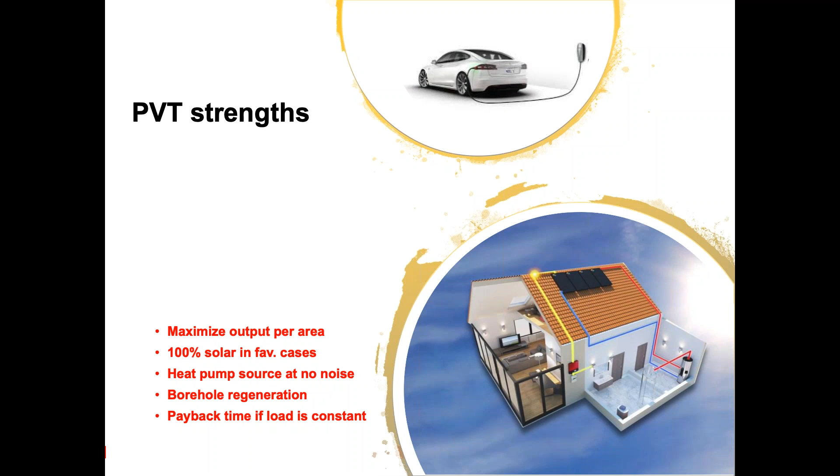The first thing I'd like to tell you is the strength of PVT. With PVT, we can do electricity for sure. We can also do heating, direct or indirect with a heat pump, or cooling, also direct during nighttime or indirect with a heat pump or compressor. What we think is our strength is that you maximize the output per area of your roof or collector area. In some cases, you get 100% solar because you can also run the pump with the PV part of the solar collectors. If you use a heat pump together with PVT, it's a nice source because you have no noise and no borehole - and if you do have a borehole, you can regenerate it during summertime. And of course, if the load is favorable, as I'll show you in some cases, the payback time is really impressive.

Now I'll explain a little what PVT is. I guess most of you know it's a hybrid technology - we have an absorber at the bottom of the collector, and on top of it we have PV modules linked to the absorber by some gluing system. You can have glass on top, or you can have no glass, which is called uncovered in common language, but for scientists it's called a WISC collector.

You'll hear the WISC label more than once - it stands for Wind and Infrared Sensitive Collector. If it's not glazed, you get some extra action during nighttime from the ambient air on top, or the ambient air at the bottom of the collector if it's freestanding.

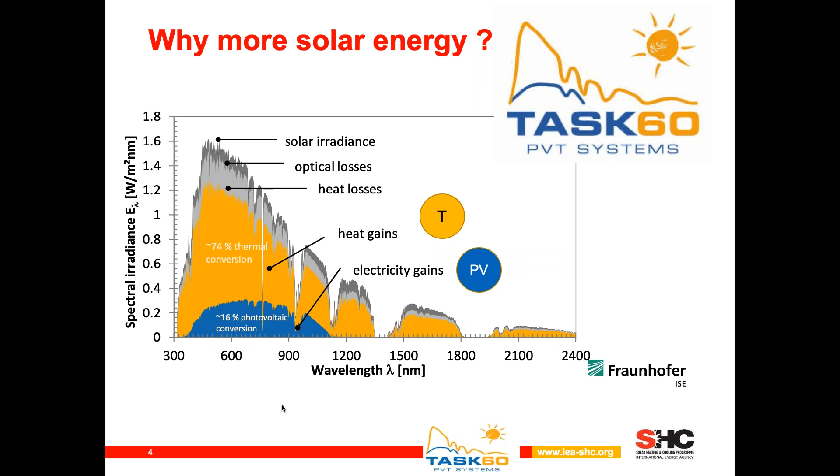This is why the Task 60 logo was designed like this. The yellow part is what the thermal collector, the absorber, is going to convert from the sunlight, and the blue part is what the PV cells are going to convert. So if you add the yellow and blue spectrum together, it's a larger spectrum than if you only used the yellow or the blue separately - that's why you get more solar energy out of a PVT module than out of each module on its own.

We have factors affecting the performance of both the PV and the thermal part. Let me simplify this. First, there's tau alpha, the transmittance and absorbance of the collector, which reduces thermal efficiency a little. Second, there's the heat removal factor, the way heat moves from the PV cell, which acts as the absorber, down to the metal sheet and then to the fluid. It's a little less efficient than a normal thermal collector, so there's a negative effect there too.

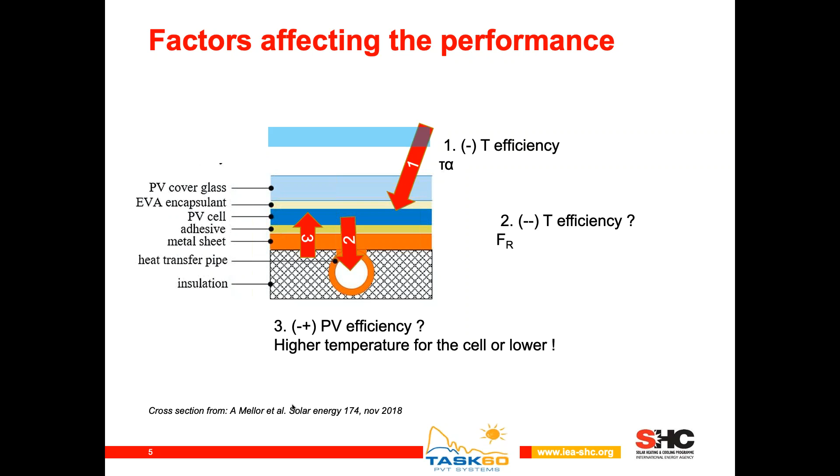The third effect is on the PV cell and module itself. At higher temperature below the PV cell, most cells perform a little worse. But with a lower temperature, which we can achieve with PVT in some cases, mainly with heat pumps, you get a bit more efficiency than without. Let's see this in a comparison.

On the left-hand side, you have 29 square meters of thermal and 13 square meters of PV. On the right, we compare that to 42 square meters of a PVT collector. The heat would be about the same, roughly 22 megawatt hours for the separate case and 22 for the other case, because we have less performance per square meter but more square meters. You see 759 compared to 524 kilowatt-hours per square meter from the thermal part.

Electricity will be much higher because we get 42 square meters of PV without any noticeable reduction compared to 13 square meters. So if you add all the energies, you get 13% more from the same roof area. Notice that on the right-hand side for PVT, the electricity to heat ratio in this particular example is 1 to 3.8. I'll come to that in a moment on a diagram to show you the relationship between electricity and heat in a PVT collector.

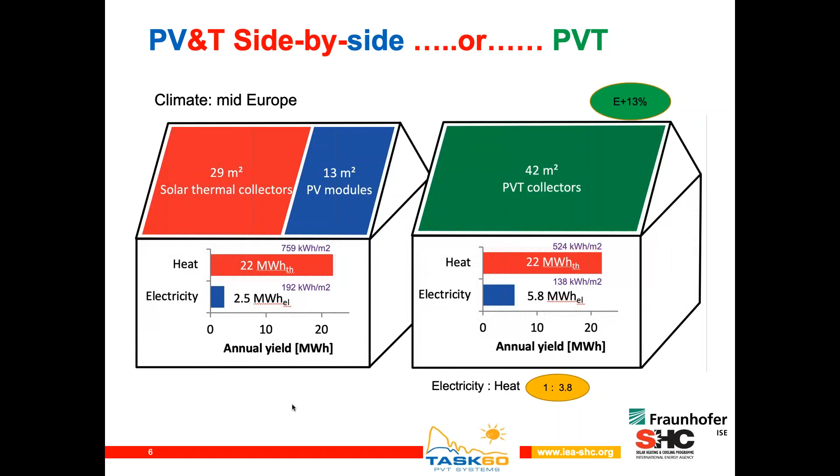Now we look at the cost problem. I'll go straight into it because I'm sure you'll have many questions. For standalone components, current average cost over Europe: a glazed thermal collector is about 250 euros per square meter, and PV is about 114 euros per square meter. Added up, that's 364.

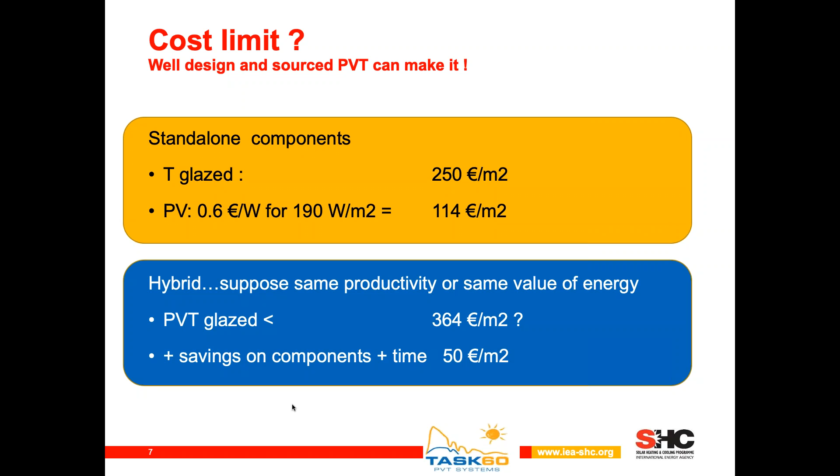If a hybrid PVT system has roughly the same productivity or energy value compared to those separate components, then the glazed PVT collector, taking this as an example, should not cost more than 364 euros, and you save a little on components and installation time, maybe 50 euros. So altogether, can a glazed PVT collector cost less than 414 euros per square meter? If yes, you better go PVT. And I can tell you the answer today, in some countries, is really yes—PVT might be really cost competitive.

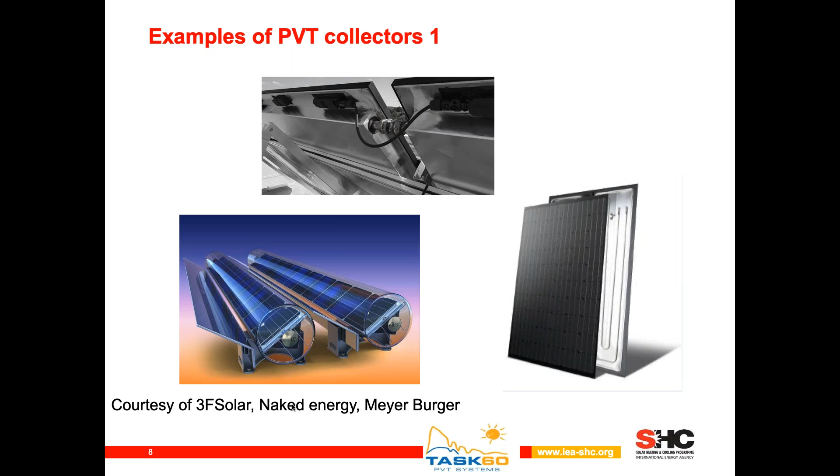I'll give you some examples; you'll see more from Laetitia's presentation. Here on top is a glazed collector with PV on top, and you recognize the absorber and the piping. What's strange for solar experts is seeing piping and wires together—this is typical of PVT. On the left is a nice evacuated tube collector combined with PVT, which can reach more than 150 degrees Celsius. On the right is an uncovered collector with an aluminum absorber, with a traditional monocrystalline or polycrystalline module glued on it.

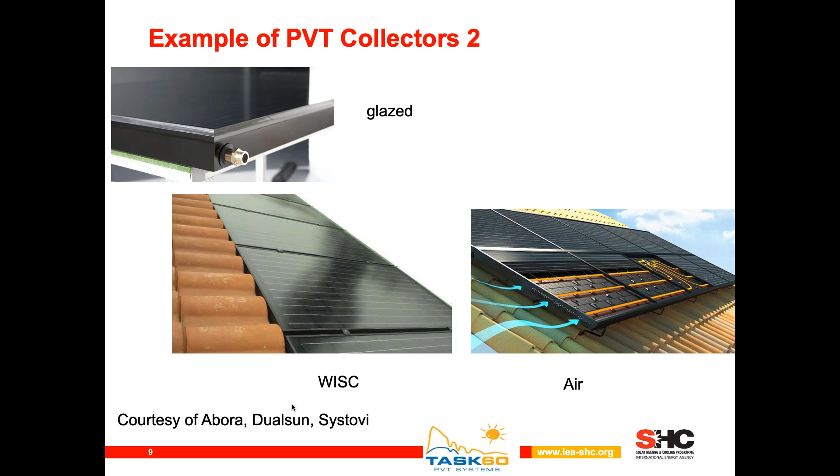Other examples here show nice unglazed collectors—you'll see lots of presentations afterward on nice projects with this. It's very thin and well integrated into the plane of the roof. On the right is one of the best sellers in France, a PVT air collector, which combines an air collector with PV on top, from a nice French company.

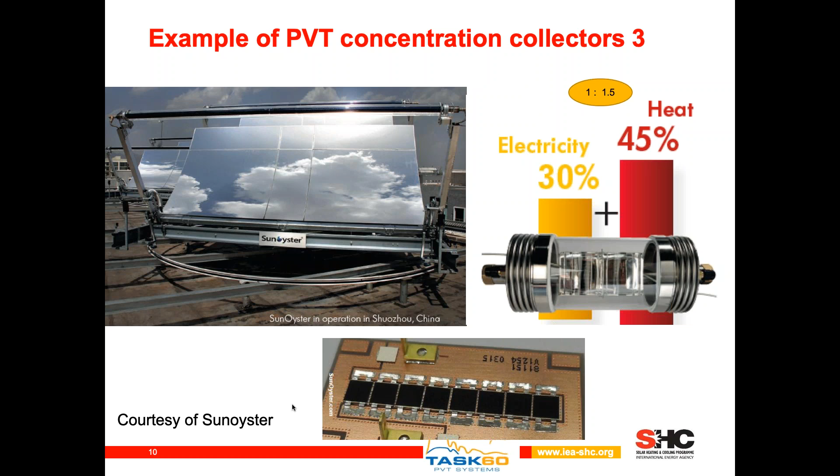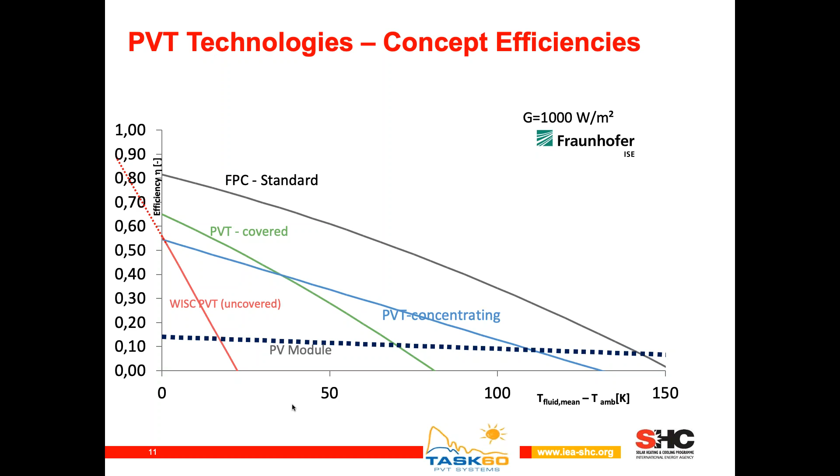Something interesting to know for PVT collectors is this: if you look at only the PV module plus the thermal part, the PVT, and you find the red arrow, let's take the one in the middle, the ratio between what the PV is producing and what the T is producing is 1 to 3.8, as I said previously.

It means the collector is mainly operating at about 45 degrees Celsius, as you can see. The more you go to the left-hand side, the less temperature the collector will operate, and the higher the ratio will be. When you move to the right-hand side, you have a 1:1 ratio.

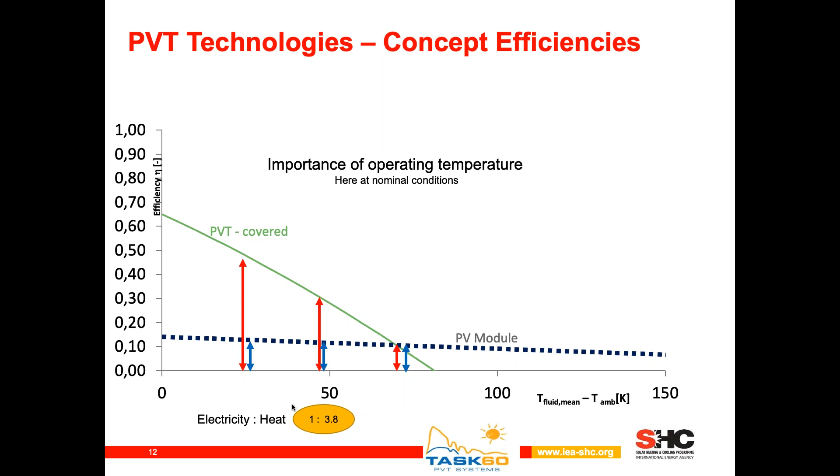So when you look at this ratio, you can get a good idea of the operating temperature, the mean operating temperature of the PVT module. If the ratio is high, it's a low temperature PVT module operating. If the ratio is about the same, it's operating at high temperature.

So now you see the applications are quite straightforward. If you have the three collectors - uncovered, covered, and concentrating - depending on the temperature of the application, you get applications where the heat pump can be coupled with an uncovered collector, so to say.

And then you move to, of course, what you all know from thermal: swimming pools, a very interesting load to supply with solar, domestic hot water, then space heating, and on top of it you have agriculture like drying and greenhouses. To the right-hand side, all the heat processes can be fulfilled up to 120, up to 130 degrees with the evacuated tube collector. So we have a wide range of applications with this PVT technology.

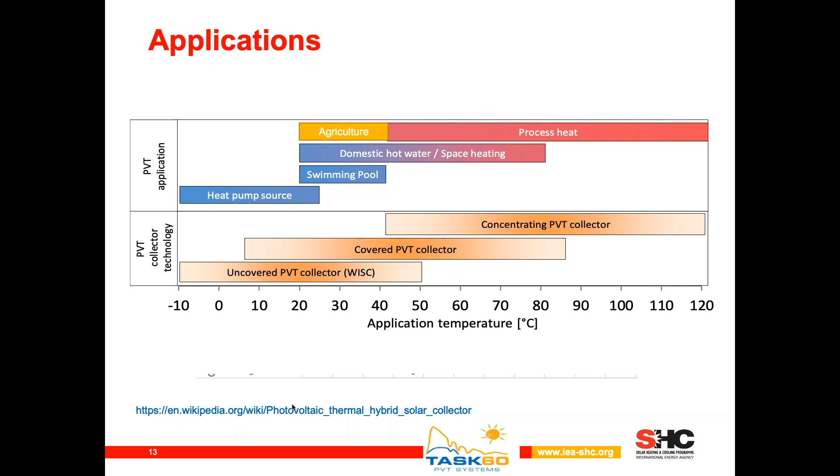I'll show you a few examples - you'll get more from Laetitia. This is very famous in France.

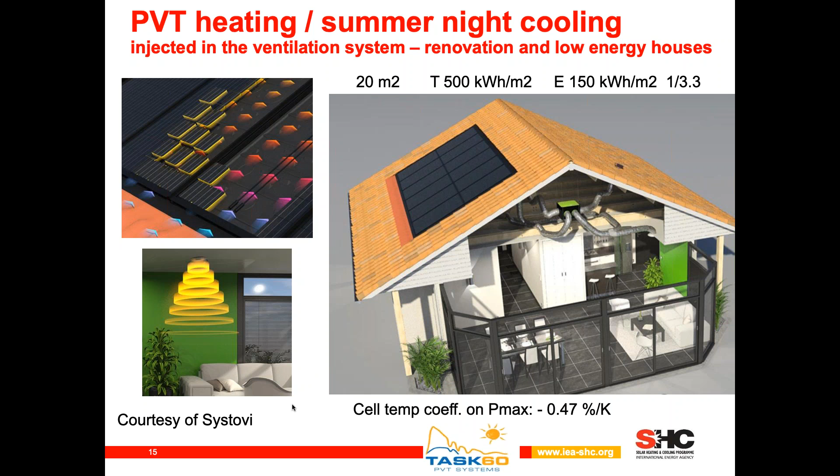Very well insulated houses can be heated by air, with an air heating system. Then you have air PVT collectors on top, producing in a ratio of 1 to 3.3, so about 40 to 50 degrees Celsius, as you remember from my explanations. This is the bulk of the French market nowadays, developed over the last 8 years, and low energy houses are keen to use that, getting about 50% solar fraction with 20 square meters on the roof.

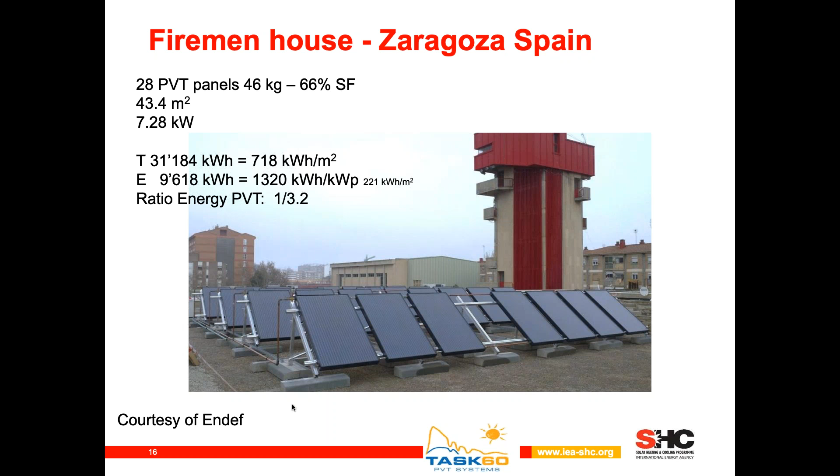And the production is quite high. The measured thermal production was 718 per square meter - that's in Zaragoza, so a nice climate - about 50% year efficiency, a little less maybe. The electricity production is also really interesting, 1,320 kilowatt hours per kilowatt peak. The ratio of heat to electricity is 1 to 3.2, so it's operating for DHW around 40 degrees Celsius. It's a 66% solar fraction for this installation in this fireman's house.

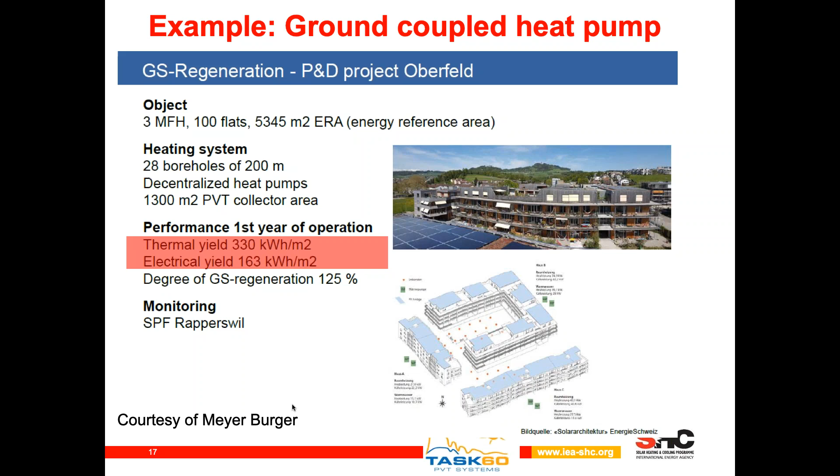So you need to recharge a little bit the storage, so to say, during the summertime. And maybe the last example I'd like to show you today is large industrial projects, which can also be favored with PVT.

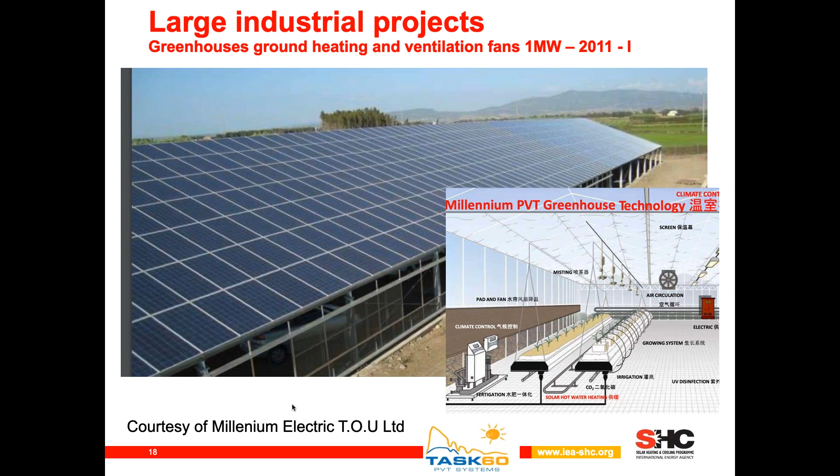You can operate big greenhouses like this, which need solar hot water, and also some heat at the foot of the plant, sometimes buried pipes in the ground. They also need big fans to move the air inside the greenhouse. This can be achieved with the PV part of the PVT. There are big realizations in Israel and in China, up to 1 megawatt with this PVT system.

A bit on the market, just so you understand that the uncovered water collector, the WISC collector, is dominating the market. Some covered collectors are fighting against that and taking over. Probably in the long run it will be half-half, but right now it's about 75%, three-quarters of the market with these two collectors, and the rest is distributed as you see.

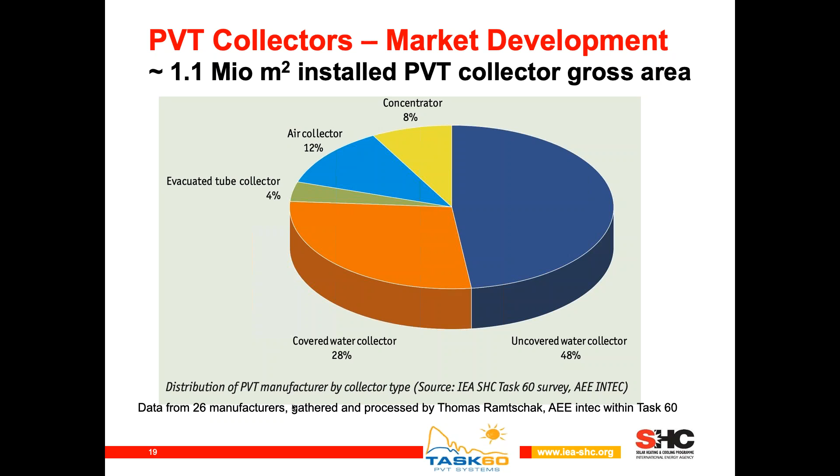We think we now have 2 million square meters of installed PVT in the world. We had a survey saying 2 years ago it was 1.1 million, and since then there's probably been some growth, so we think we have 2 million square meters. It's not that much - you may know thermal collectors total 180 million square meters in the world. So we have less than 1%, about 1%, but it's growing probably faster than thermal collectors.

So for hotels, for example, you get a nice payback time. I'll show you an example right after this slide - we can reach 4 to 8 years for DHW in hotels in latitudes within the big sun belt around the world. You'll see other examples with WISC uncovered collectors and heat pumps from Laetitia right after me.

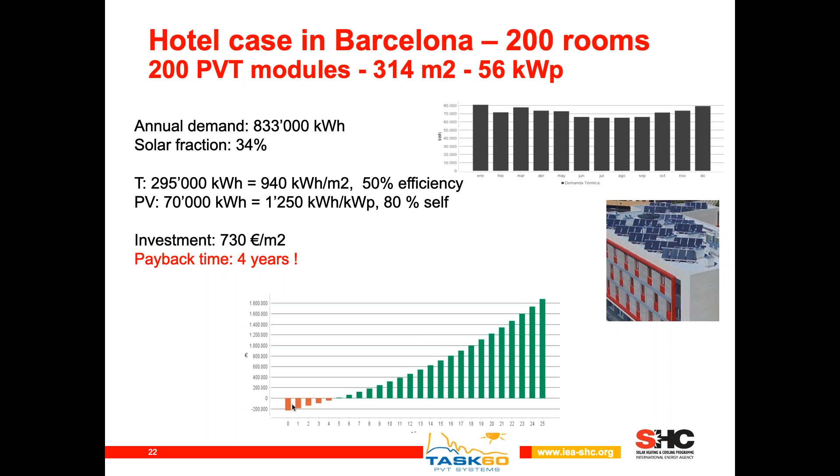So the payback time, if you do the division, is 4 years. You see this at the bottom - you have 4.5 years to finance, shown in red. Afterwards, the green part is the present value of the money the hotel owner gets back. So if the lifetime is 25 years, he will get more than 1,800,000 euros back from this installation. So it's a very interesting investment.

I will conclude with discussing a little bit very rapidly the challenges we're facing with PVT. As I said, industry is there, so we have reliable product. Models, simulation, and prediction, it's now done. We've been integrating the nice equations for all kinds of collectors in most of the simulation models.

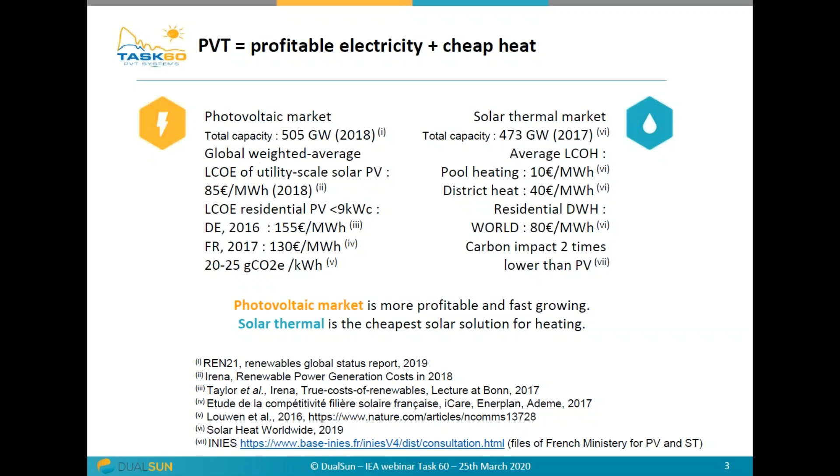Why is it interesting to consider electricity and heat at the same time? Because building and construction represent around 39% of energy-related carbon dioxide emissions. So the World Green Building Council have launched a coordinating action toward 100% net zero carbon buildings.

By 2050, we already have in France, for example, the label for positive energy and carbon reduction since last year. And we have a double constraint: a constraint in energy consumption that should be low, but also in the life cycle analysis of the building, we need to respect low greenhouse gas emissions.

If you try to do this, for example, we tried it in the H2020 project called EXCESS. We tried to build some positive energy buildings and also to refurbish buildings into positive energy buildings. The solution to achieve this goal was to use PVT with the ground source heat pump.

That's really what Martin Bouygues also told us. Here is his testimony. Bouygues Construction is one of the biggest building companies in France, and he says: one thing is certain, we will always need to produce domestic hot water, and the space on our building rooftops is not infinite. So the two-in-one technology, the PVT technology that combines two essential energy needs of buildings today and tomorrow, is very efficient. He tried to use this technology for his own building and observes its excellent performance every day.

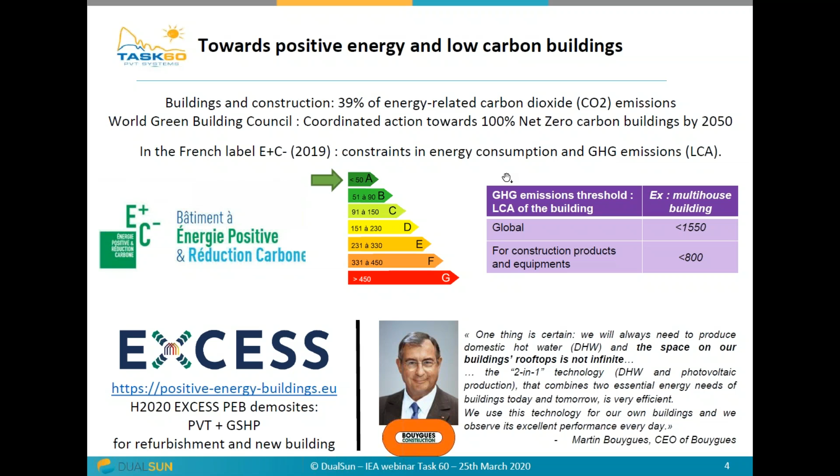About prices, you all know that PV has a very quick learning curve. Maybe you don't know that solar thermal also has a very quick learning curve. That's because PV doubles its total installed capacity quicker than solar thermal does.

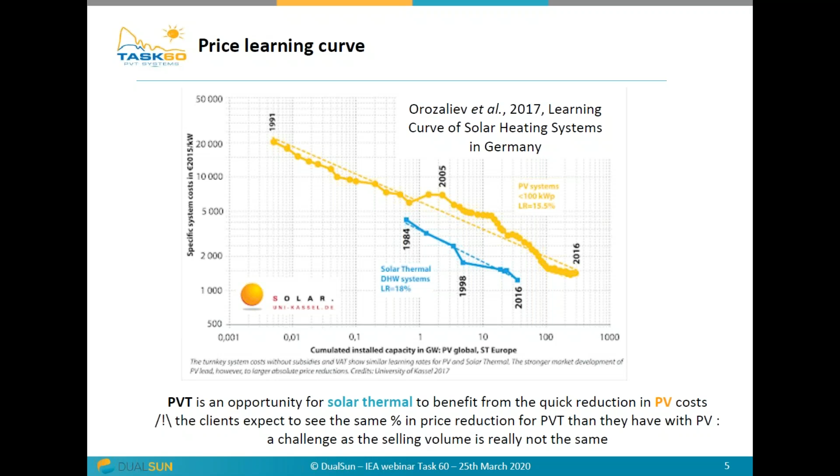I think really that PVT is an opportunity for solar thermal to benefit from the quick reduction in PV cost. But just be careful, because clients expect to see the same percentage in price reduction for PVT as they have with PV. So it's really a challenge for the industry, as the selling volume is really not the same in PVT as in PV.

We are speaking about PVT, but Jean-Christophe has already shown us that PVT has a lot of variation. We have variations in design in all layers. Here are the proposed layers you can find in PVT. In the front face you can change the insulation. You have the WISC, the uncovered PVT - WISC means wind and infrared sensitive solar collector. But you can also have overglazed PVT or vacuum tube PVT.

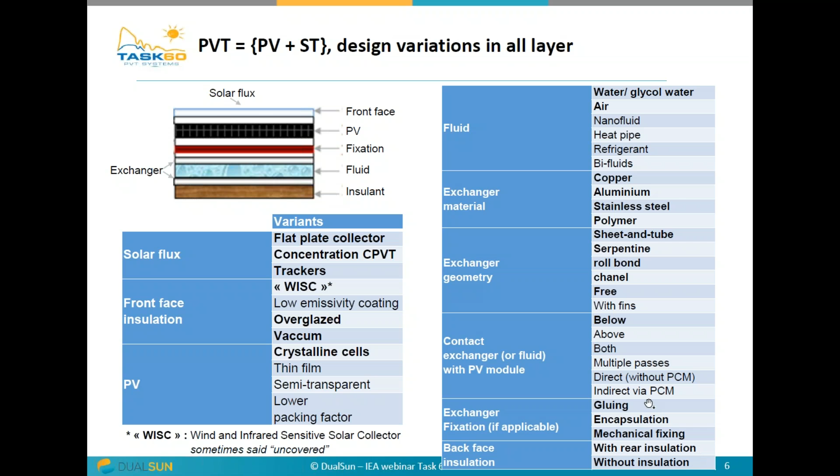And for the PV, it's the same - you can choose many cell types. For the fluid, you can choose water, air, and other fluids. For the heat exchanger, you have different materials and geometries; the contact between the heat exchanger and the PV module can vary, and the fixation can be glue, encapsulation, or mechanical fixing. For the back face insulation, you can choose to have no insulation or to have rear insulation.

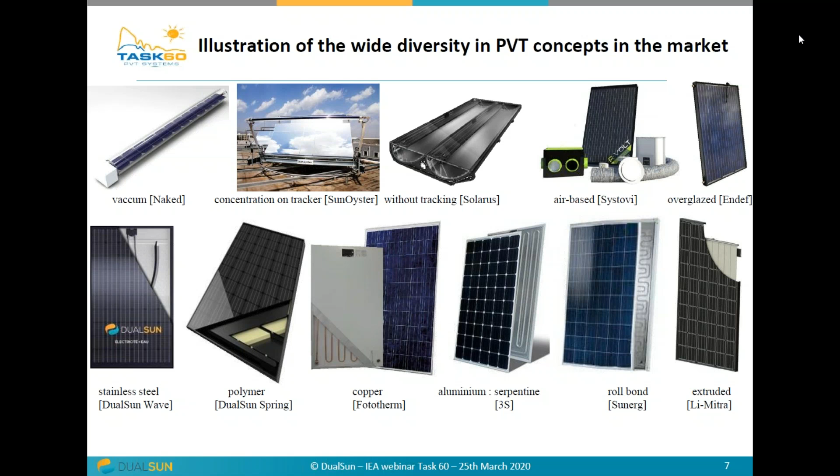You have a lot of materials used, for example stainless steel, polymer, copper, aluminium, and with aluminium you have a large diversity in design - you can find serpentines, roll bond, extruded aluminium. But we have good news for this kind of collector.

We already have the norm, the quality norm, to qualify the collectors. Since 2013, the Solar Keymark clearly identified how to approve a flat plate PVT. You have to pass, for the whole PVT module, the IEC for photovoltaic quality, even if your PV laminate is already certified. And also you have to pass the ISO for solar thermal quality with the whole PVT module, and do the performance testing with the photovoltaic running in MPP mode, meaning at the maximum power point of the electricity part.

Just a warning here: the aging cycle you have to pass for the IEC is the same as the one you pass for a normal PV module, so you go up to 85 degrees. So if your PVT stagnation temperature is over 85 degrees, you don't have the guarantee from the certification that the PV part of the PVT withstands the cycle above 85 degrees at your stagnation temperature with no degradation of PV performance. You need more information from your manufacturer.

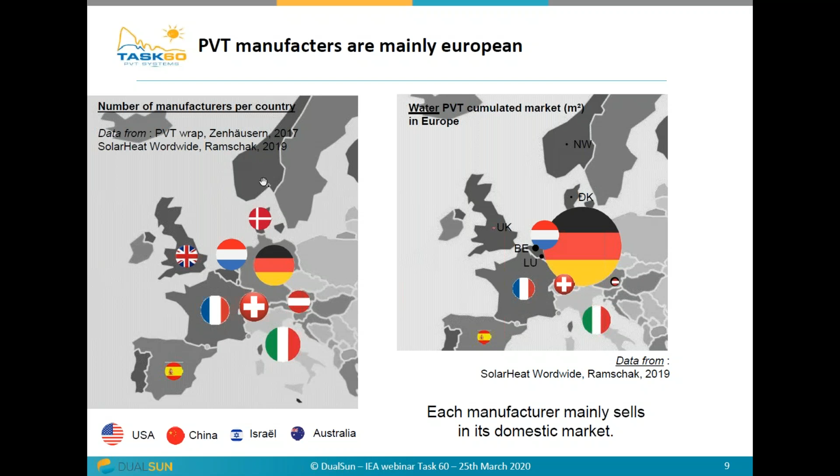We have a wide typology of clients because we can provide PVT for individual homes, multi-house owners, social housing owners, but also for health, sports, tourism. So the clients to address are very large, and also the systems that we can consider are very different.

We can go directly to preheat solar domestic hot water or pool, for example, but we can go also through a heat pump. We have three types of heat pump connection: we can go directly with the glycol to the heat pump, or we can have a storage in a tank, or a storage to the ground.

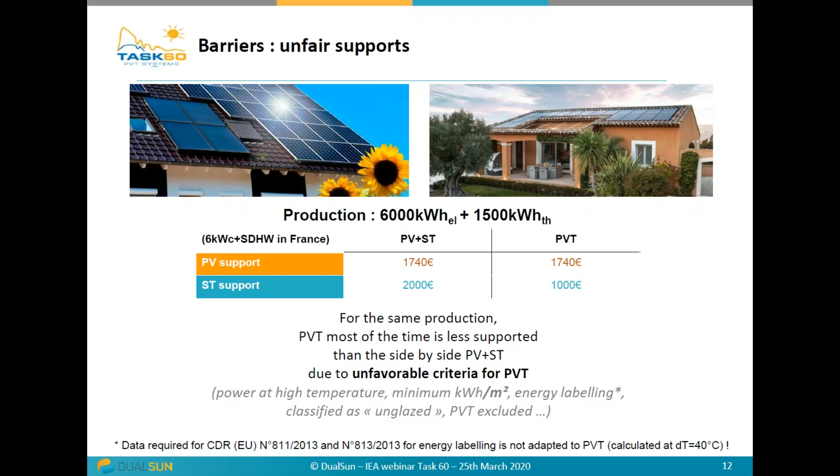And also sometimes PVT is simply excluded from the support. So that's really a problem for the PVT market to grow as quickly as it could if we could have fair support. So just to sum up,

the strengths and opportunities PVT has. PVT is already competitive, as I've shown, Jean-Christophe already. It's already competitive in comparison with PV. We already have a lot of manufacturers, more than 55 manufacturers in the market. The norms are already in place. We have thousands of successful PVT installations already running.

But as weaknesses, we have lack of awareness among prescribers, maybe because we are still a young technology. We are more complex than PV, and that maybe explains why we still have unfair public support at the moment.

But we have opportunities. As PVT, we can take advantage of PV cost reductions. PVT is really an interesting solution for positive energy buildings and low carbon buildings. We already have many plumbers already qualified in solar heating - that's good news for us, we need them, they can deal with the complexity. And we have seen that we can have synergies with heat pumps.

As a threat, like all renewable energy, we fear low fossil prices - we need high fossil prices to be interesting. And PVT is sometimes asked to follow the rhythm of PV price reduction - that could be an issue. And if we have the success we hope for and become a fast-growing market, in Europe we will have the difficulty, as always, to finance massive investment for industrial companies.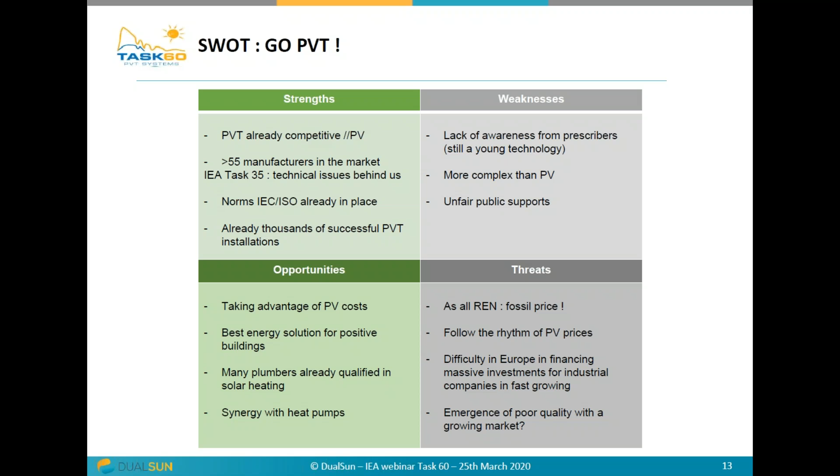I think it's specific to Europe, but I think we can easily tackle this threat. If we have a booming market, maybe we can have an emergence of poor quality, but we already have norms and qualifications for plumbers, so it's maybe not a big issue. So about PVT, what I remember is we have the norms, we have the plumbers qualified, we can take advantage of the PV cost. So my conclusion will be, let's go to PVT. Thank you.

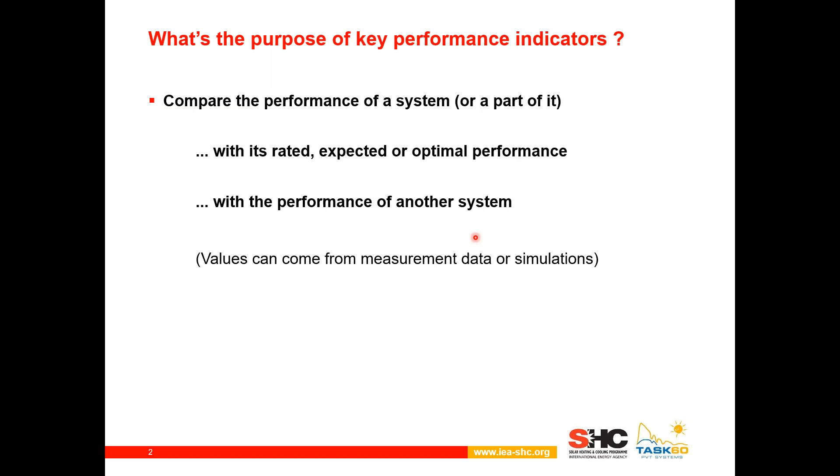Now, in task 60, we thought about what indicators could be helpful for PVT systems. The idea was not to introduce as many new ones as possible, but we wanted to also use those that already are used in other domains. So a big list came together of possible indicators, of which I will give you here just a selection, the key performance indicators. And we have split them into 3 categories: energetic performance, economic performance, and environmental impact.

So in the energy category, we think the most important will be these. First one is thermal and electrical solar yield per square meter - that doesn't need more explanation. Second would be thermal and electrical utilization ratio - here the yield is divided by the irradiation, which is helpful to compare systems that have different irradiation sums, are at different places, etc., to have a more fair comparison. Third, we want an indicator that tells us about the quality of the heat, and there we want to know something about its temperature. We would suggest using the so-called power-weighted collector temperature, which is a weighted average of the collector temperature, weighted with the thermal output.

Then further, we want to give, if possible, solar thermal and electrical fractions - that's how much of the heat or electricity demand of a system can be covered by the solar installation. And then here, a particular thing for heat pump systems is the seasonal performance factor, which is very handy to compare different systems. So these 5 are for comparison of solar systems, and these for heat pump systems.

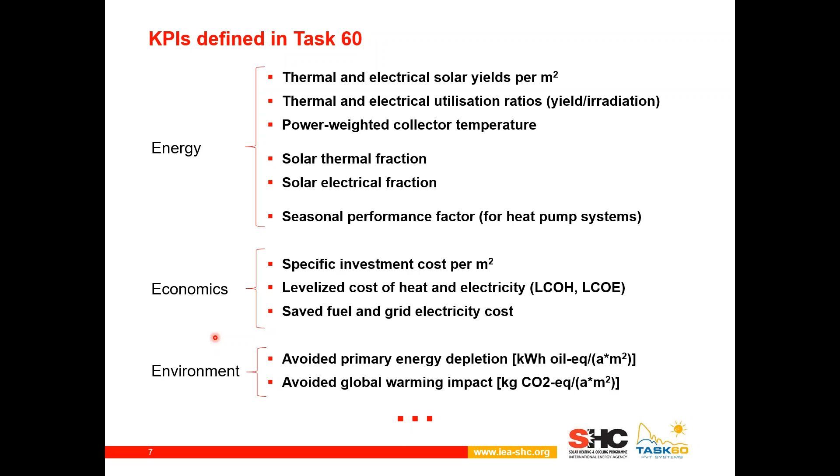Now, there's a lot more detail to say on this. Many of these indicators come in different variants, and you have to specify system boundaries, etc. I'm not going to go into detail, but you can read up in a report that will come out this spring on our Task 60 webpage. We also have a nomenclature defined there which we would like to encourage people to use.

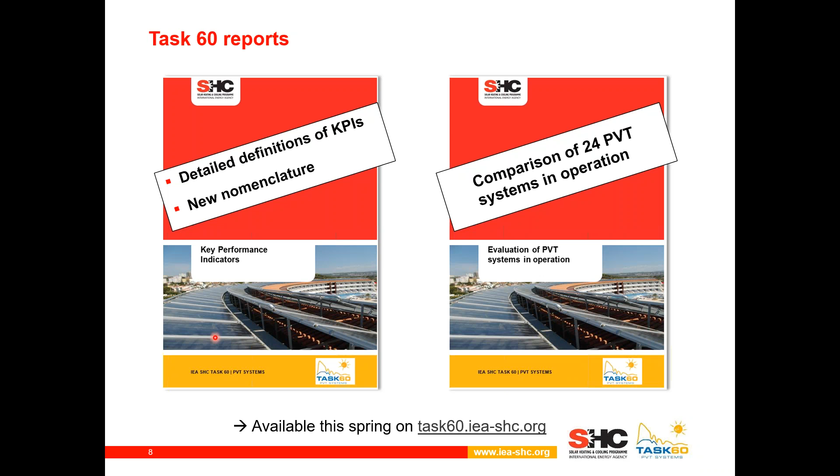The second report is about a comparison of 24 systems, of which later on I will show a little extract. But before coming to that, I want to take example one.

Example one is a building complex named Sotchà in Switzerland. There we have the situation that we look at three buildings - A, B, and C. All are built exactly the same, orientation almost the same, but they differ in that they have different solar energy systems.

Building A has a PV plant plus battery storage. B has a PVT plant, and C has a combination of PV and flat plate thermal collectors. All systems have a heat pump coupled to 5 boreholes each. In B and C, solar heat is used for borehole regeneration, domestic hot water, and space heating.

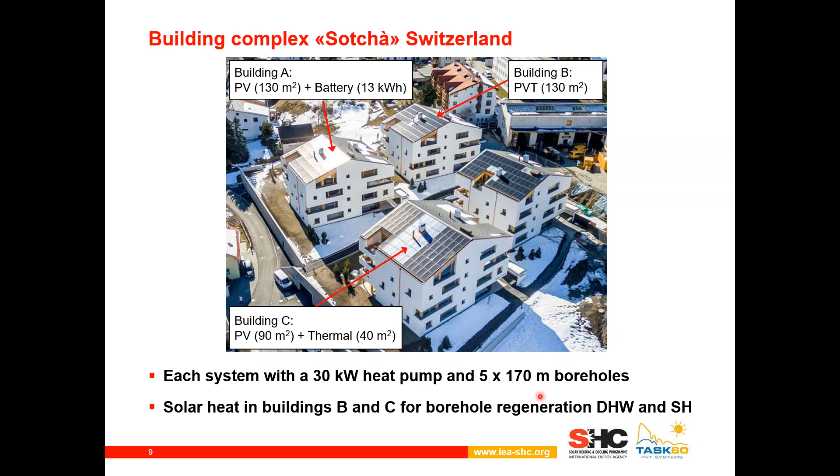The basis for the comparison is the energy balance. On this plot, you can see what energy goes into the system and what output it gives - for systems A, B, C. What goes in is grid electricity, PV electricity, ground heat, and in two of the cases also solar heat. What goes out is heat for space heating, hot water, and - not related to the heating system but still a useful output - PV electricity that goes to the households and to the grid.

Here you can already see that even though the buildings are exactly the same, consumptions are different. So you should bear this in mind when you compare them.

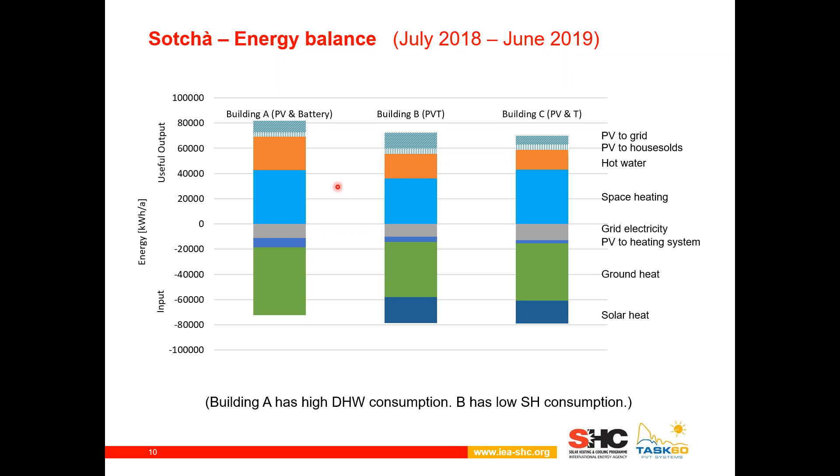This is something well known - we divide the yield of a component by its surface area, like electricity yield of PV divided by PV surface area, or the same for thermal components. There we have the electrical utilization ratio, which is similar in all cases - PV panels operate more or less at the same efficiency. The thermal utilization ratio is higher for the thermal collectors than for the uncovered PVT collectors.

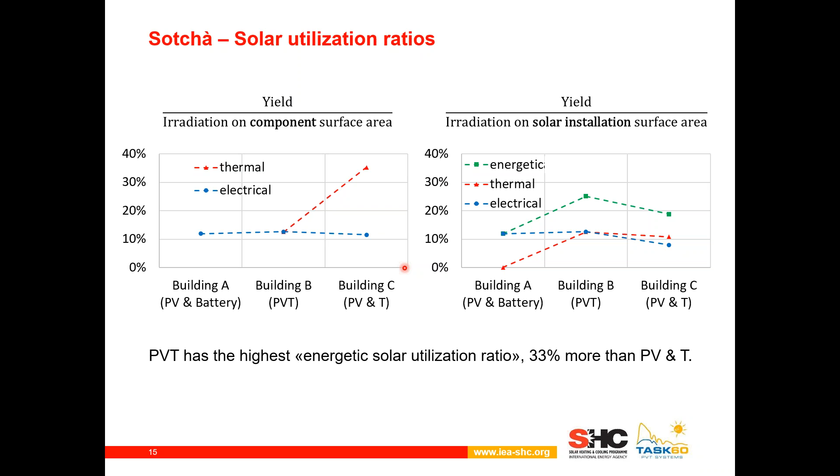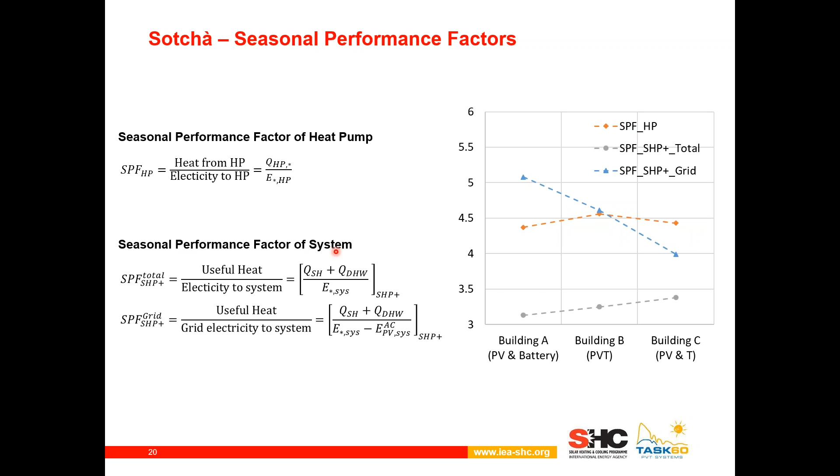So these are the things I just said, and there's a lot more to say on these Sotchà systems. I would like to refer you to a future final report, which should be published this spring, and you will be able to find it on our webpage, spf.ch.

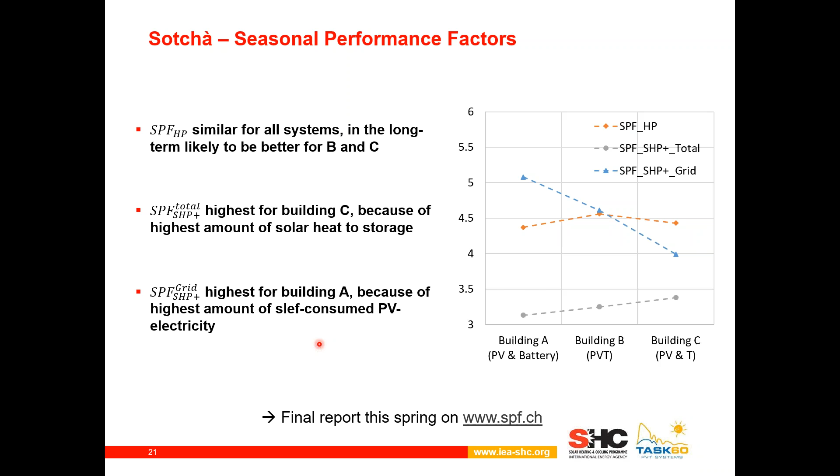Now I want to move on to the second example of application of key performance indicators: the 24 systems that Jean-Christophe Hadorn mentioned, collected in Task 60. Systems in many countries, with many different applications—domestic hot water, space heating, pool heating, ground source coupled systems, etc. We have different systems with varying collector types: covered, uncovered, concentrators, evacuated tube, and also quite a range of different collector field areas, from a few square meters to 600 and more square meters.

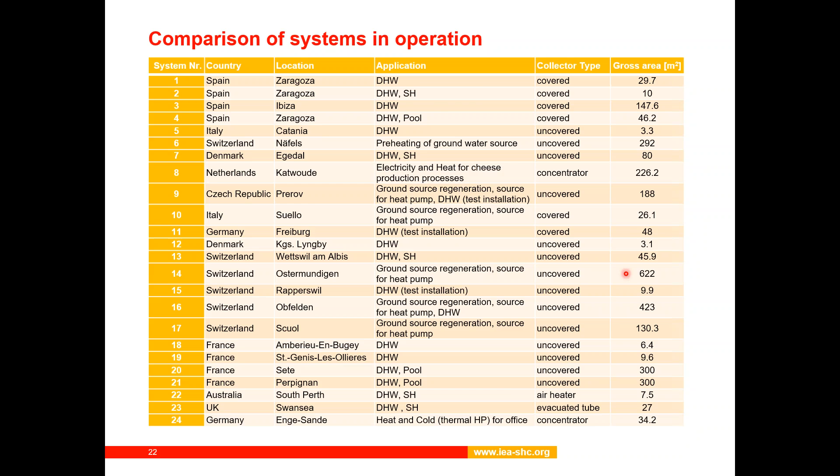Here I want to look first at the utilization ratios—thermal in orange and electrical utilization ratio in blue—categorized by different heat uses. You can see we have quite a spread, very varying utilization ratios. Some of this is explained by different locations, different climates, and the fact that some systems might need more optimization, some are pilot systems, etc. But still, if we take the average, we see more than 25% thermal utilization ratio, with a large spread, and about 12% or so electrical utilization ratio.

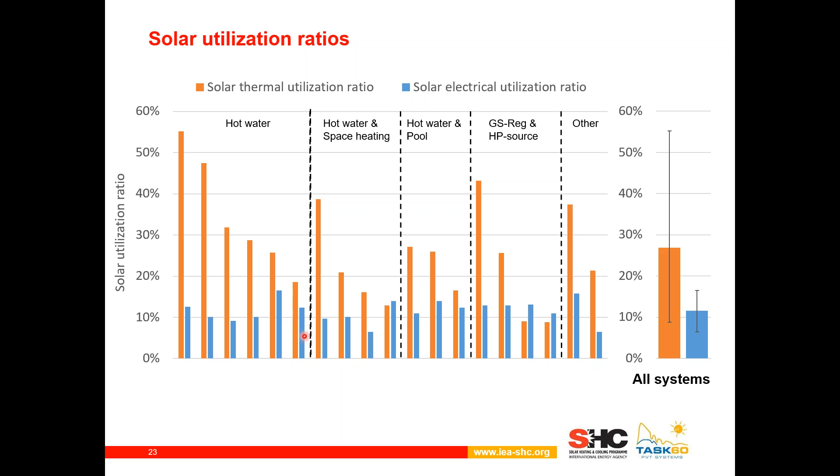Conditions of operation obviously have an influence on these values. If you take only the systems with uncovered collectors and plot the thermal utilization ratio as a function of the collector operating temperature—this other KPI—we see a rather clear trend: as you'd expect, higher operating temperatures give a lower utilization ratio, consistent with expectation.

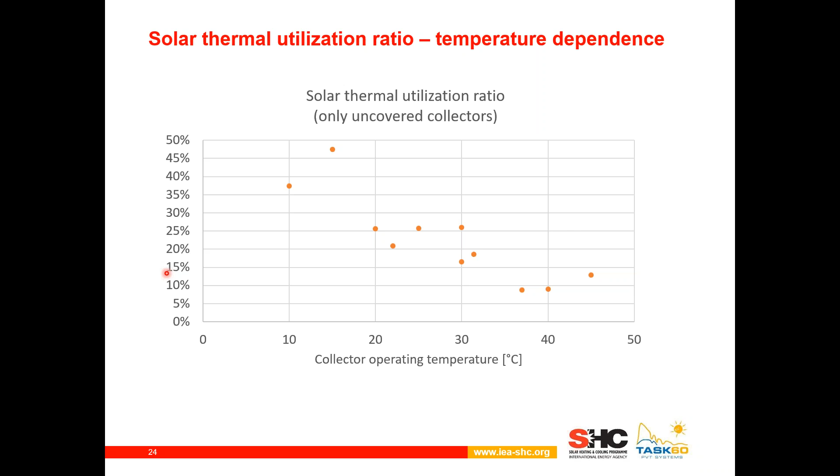Now I would like to come to a financial KPI: the specific investment cost per square meter. Here you can see there are already fewer points—we don't have the numbers for all systems, so I only plot those available. Also here, probably due to low statistics, there's not a clear trend that this decreases with collector field size, but with more statistics this is very much expected.

What you can also see here is that we have a very high spread, between roughly 400 and more than 1,600 euros per square meter. But the good news is that we really have values that are low, around 400. That's a commercial system, in the order of magnitude that Mr. Hadorn mentioned before, of 360 euros per square meter, where things would be cost competitive. I think in other cases things can be cost competitive too, because this is often a matter of context.

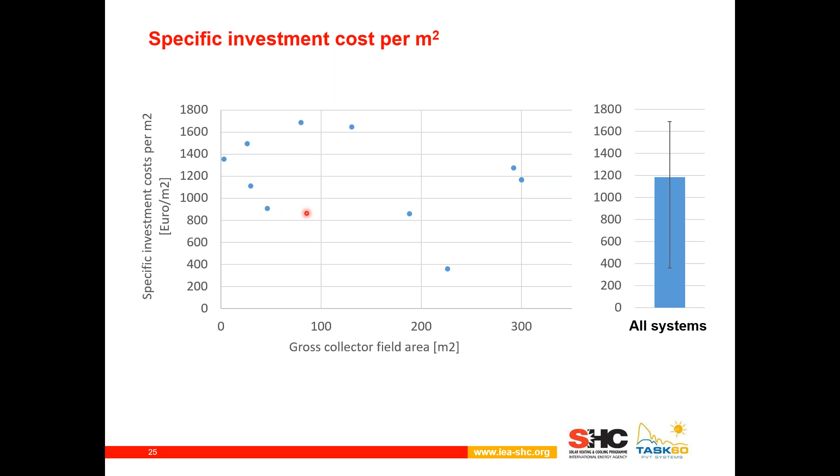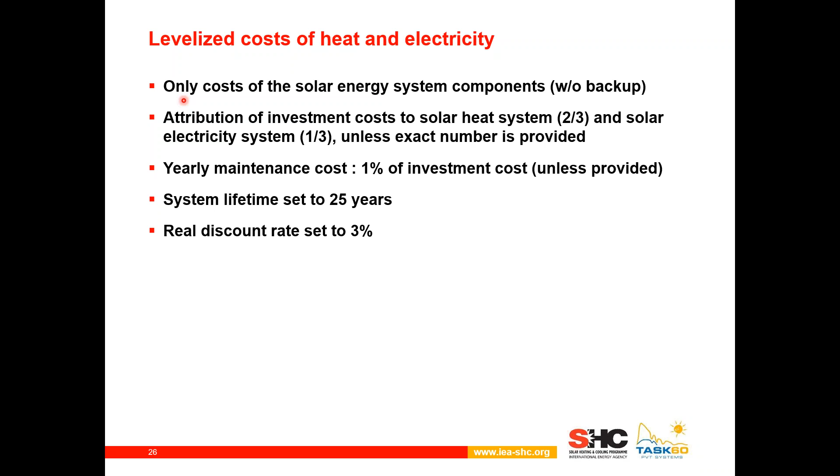Let's go on to the next indicator: levelized costs of heat and electricity. Some background: only the costs of the solar energy system are counted, all components, but not the backup system. We attribute costs to the heat system by two-thirds and electricity system by one-third. That's a bit of an open question in the case of PVT, how do you attribute costs. Yearly maintenance costs are taken to be 1% of the investment cost, system lifetime is 25 years, and real discount rate is 3%. With these assumptions, we get the following picture, where I don't say which system is which, but you can see an idea of what values can be achieved.

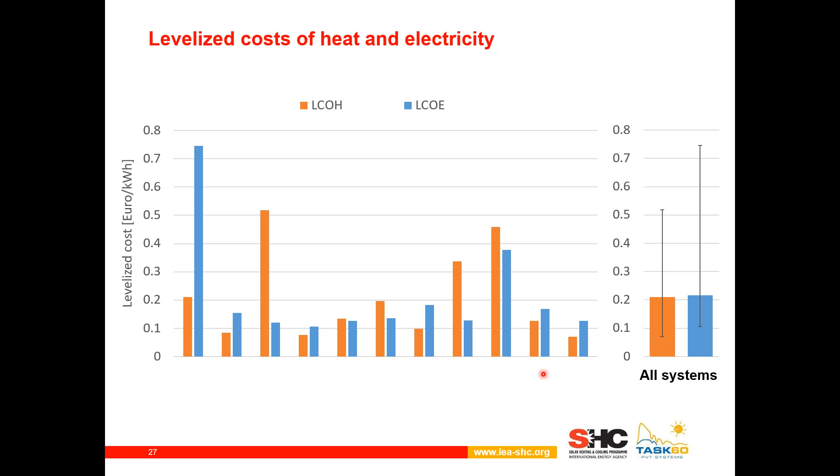I'll try to answer the first question about the list of manufacturers. We don't have a complete list of manufacturers in the world because there's no association of PVT manufacturers. We try to have one in Task 60, but it's not complete. I guess this is a job we could try to handle before the end of the year, having this kind of list. Maybe Laetitia, you have something better than everyone else?

I know many manufacturers, but I don't think we have an official list anywhere. No, I don't think so. Maybe with Solar Keymark, along the time, we'll have it, because the good manufacturers are going to ask for a Solar Keymark. So I cannot say we have the list now. Probably we have 50% of the manufacturers, but the big ones, the ones appearing on the statistics we have, because we have been collecting the statistics directly from those manufacturers.